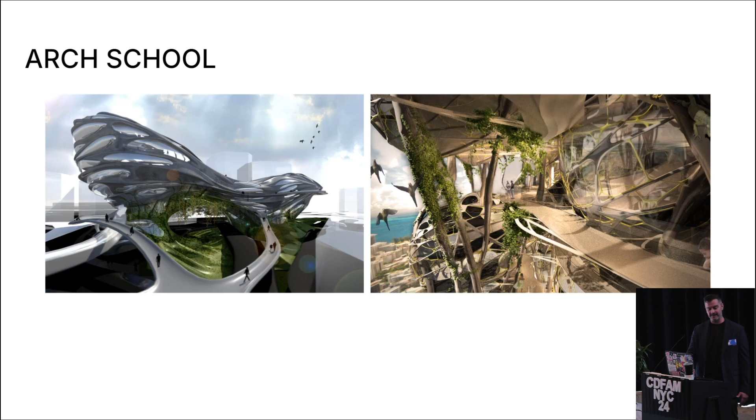We did get some cool projects under our belt at first. The second we graduated from Penn, Arthur went to Paris, I moved to San Francisco, and we started working on some architecture, and we did leverage some of those things we learned.

So on the left you see Adobe Illustrator, if anyone remembers Scriptographer - it's a throwback for sure. It's basically a patterning plugin that goes into Adobe Illustrator, and mixed with AutoCAD, Arthur was able to make some really cool facade systems that were plasma cut and painted green.

And on my side, I was continuing with Rhino and Grasshopper, but really starting to learn Revit at a corporate level, and understanding the very subtle facade systems that were, in this case, like basically stones and different types of masonry. So it was really exciting to start to leverage this stuff outside of school.

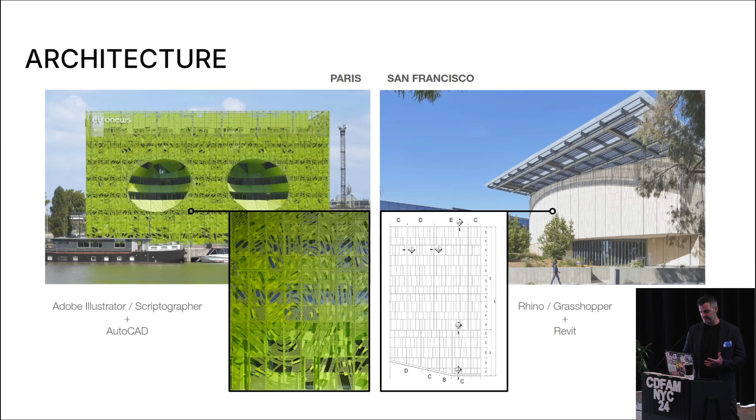So in 2012, we launched Slicelab, like I mentioned, remotely from San Francisco and Paris. There was a 9-hour difference, and at first that was something we had to work through, but then we realized it was quite an advantage, not a disadvantage, because it allowed us to work around the clock. So if I was done with something, I would pass it on to him, he would continue it, and round we went.

Obviously, seeing each other was very rare at the time. We have also entirely worked remote since then. We have never lived in the same city since we started the company, so it was really fascinating. During COVID, not much actually changed in terms of our workflow. Obviously, clientele and everything was a little different, but we've worked between New York, California, Colorado, and Massachusetts.

So starting off, the printers that we wanted to be using were not very big, so we would not have access to that kind of stuff. I don't even want to admit how much we paid for this Ultimaker that we had to assemble ourselves, and that was really challenging to use. But that was the first printer that we had.

We thought we were going to build out a whole lab and do this whole thing, but we quickly realized that was not going to be the path if we wanted to be successful, and we would want to focus more on the actual design and let other people print stuff, even though it was really helpful and intuitive to design the stuff and see it printed right in your space.

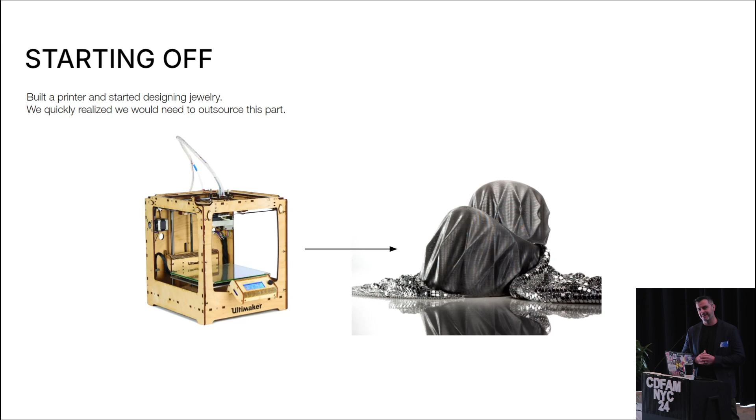We started with jewelry. Jewelry was something that was really translatable to what we learned in school, and it was something we could print relatively quickly and learn from. At the time it was kind of in the industry, people were starting to do it a little bit. We were initially inspired by the architecture we came from, so we took those structures we found very similar to the designs we wanted to use.

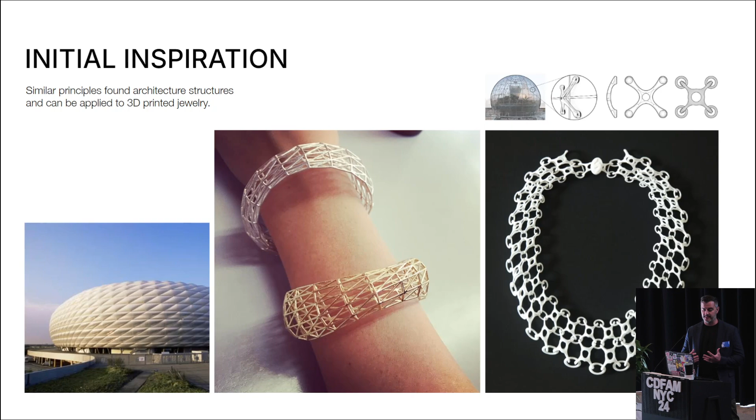We extrapolated the principles and tried to make jewelry out of it. We started relatively simple at first with FDM prints, then we got into metal and casting, and also chainmail-like lattices that kind of resembled this stuff. We got really interested in that, and that's when Autodesk basically said, why don't you guys come to Pier 9 and work in San Francisco.

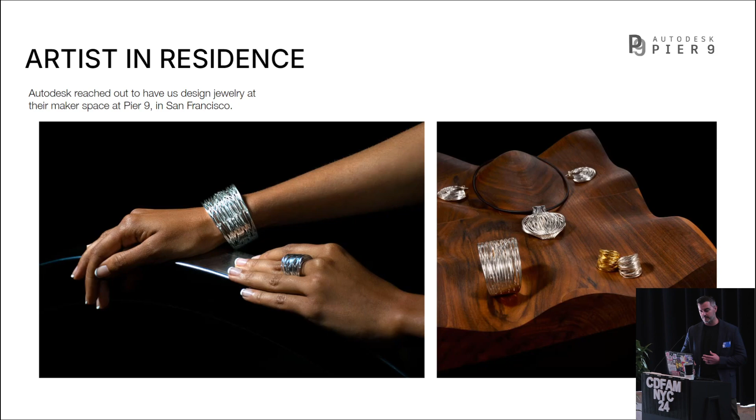Design some jewelry with all the state-of-the-art stuff we have here in the lab, and all the software you can use, and see what you can do. They specifically wanted us to work with the printer they were about to launch shortly after our time there. So at the time we created a few lines of jewelry.

They were all inspired by the suspended weightlessness you see in marine life. That elegant time frame where something is just floating in time — you take it out of water and it looks really different. We were really fascinated by that. This is one of the lines of jewelry.

This is when we started using hair systems in Maya, basically like a curve attractor computational software plugin. It's actually built in now, but it was something where we started to understand the workflow of how we would take our thought process and actually make the geometry, and have control over it — not just make a single one-off piece.

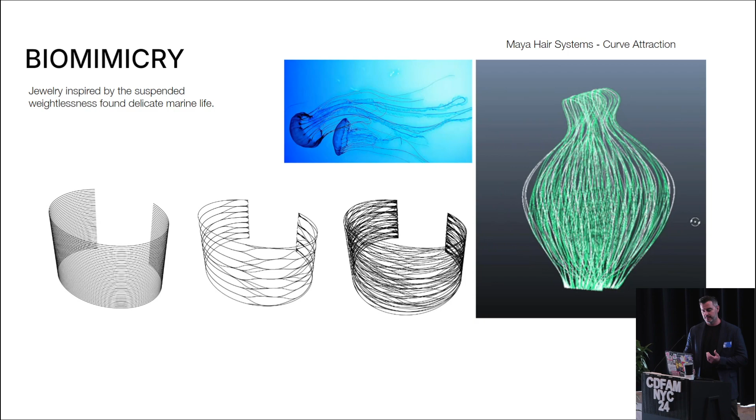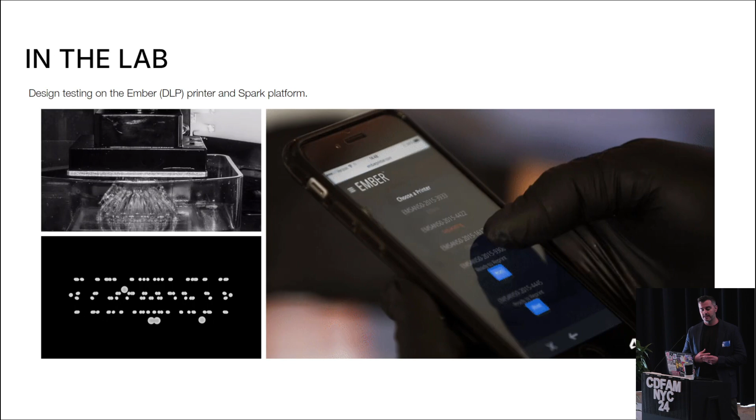But what was really exciting, and a pivotal point in our time with Slicelab — this was about 3 years in — is that we were part of the lab. Arthur was flying from New York every 2 weeks, and we were able to be inside the lab, both testing this Ember — this is, RIP, it's gone now — and their Spark platform, which you see on the phone here.

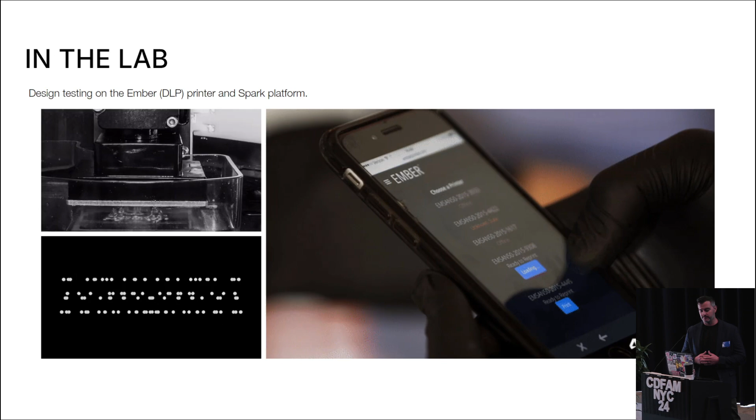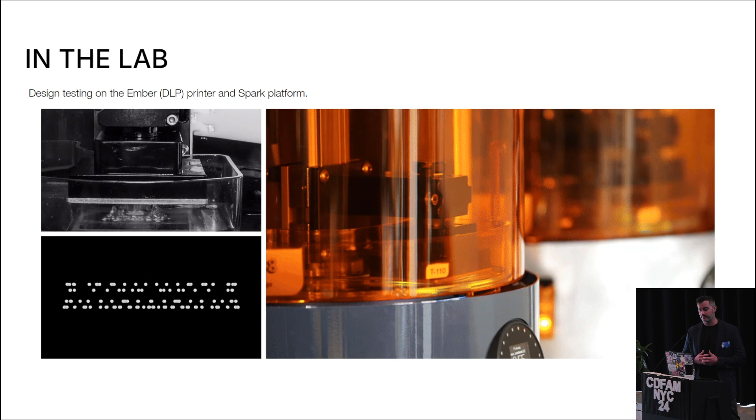It was really fascinating to be able to basically change stuff on your phone, send it to print, go get lunch and come back, and then really start looking through the slices and how the machine would make it. But really it was a lot of material testing. There were a lot of updates to all sorts of resins, specifically wax-infused resin that we had to basically burn out for the casting process eventually, and testing out what was working and adding little things to the machines.

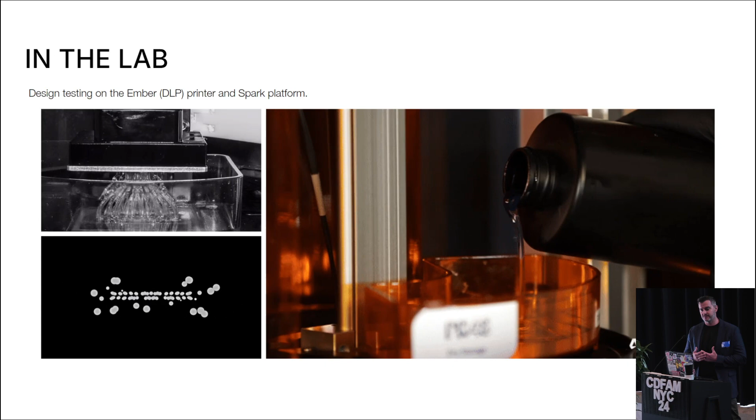And it was basically, we realized that this is what we wanted to be doing for sure. But that being said, we also still had the goal to continue to try to claw back our way into architecture — we're still in love with architecture, and we still are today. But the design scale and our focus has basically evolved over time since the beginning. So we went into product design and started getting larger into event space. We built this cool tree house in Santa Cruz and started doing restaurants and residential complexes.

But we realized at that point that as we were getting bigger, we weren't doing that same digital fabrication that we wanted to as much. So we kind of went back down scale and kept around the product design scale. And we're basically going to cover two scales here today of some of the projects we've been working on.

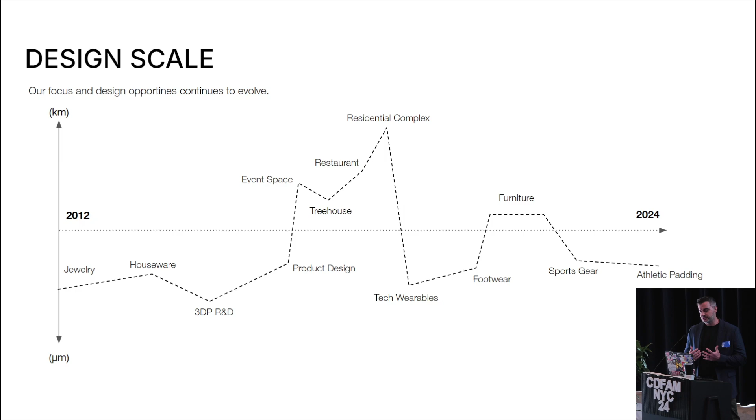So finding our niche throughout all those different scales, it was exciting to realize that really design innovation for us was just through simplification. So as we did design research on material, geometry, technologies, and all sorts of different workflows and fabrication methods, we realized that if we can just take the simple aspects of them and apply them in correct ways, we can basically make product design for additive manufacturing pretty exciting and pretty fast.

So computational craftsmanship, which is basically the title of our presentation, is something that we like to hone on. It's basically all those years and different ranges of fields that we've been in, and taking a little bit of each one and using those to our advantage to make our designs possible.

We always look at software as something that is deliberately chosen, and the workflows we make help us create interesting outcomes. We don't see it as something that defines our design language; it actually enhances it. So we introduced a sensory layer as well, which allows us to have a quick feedback loop once we start printing and touching stuff, making sure our work isn't detached from the reality it inhabits.

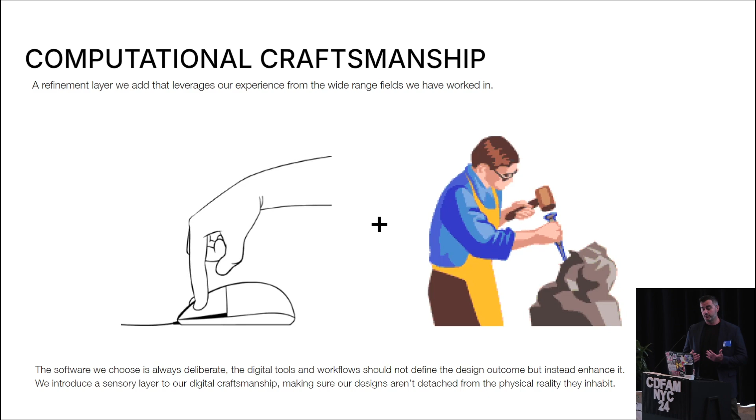So our digital toolbox, which is basically what we've been building over the last 12 years, includes our go-to softwares, but we experiment with everything. If you have new software you want us to try out, we'd love to try it. Mainly we like to focus with Rhino and Grasshopper and have our own workflow, but we've also played a lot with Maya and Fusion 360, and recently a lot with nTop as well.

Basically these workflows are just as important as the design elements themselves, because they allow us to make really quick iterations and shorten that feedback loop so we can get products out faster, since we're not only doing research, we make actual products for clients.

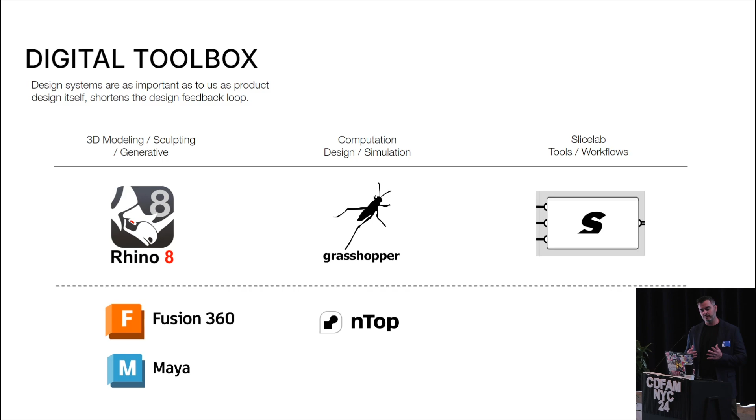So I'm going to cover large scale designs here. Basically furniture was something that we've recently been focusing on a lot, and this is all R&D, so it's been exciting to see where the technology has gotten to since we first started, 12 years ago. Recently we did what was called the carved bench with Eventscape.

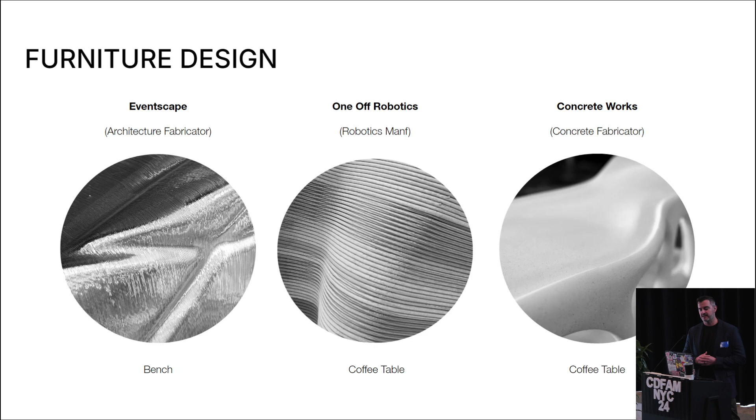It was really exciting to use AI Build for the first time to understand how a company that fabricates things in the architectural world works, and to really understand the tool path and how we can simulate non-planar printing, as well as jump between tweens. You can see there are a few layers here, and these are some of the pinch points we have right now with the software.

So this is where we come in to work with engineers or whoever's on the software side to fix that. This was the first prototype, and I wanted to show that one so you can see the lines there.

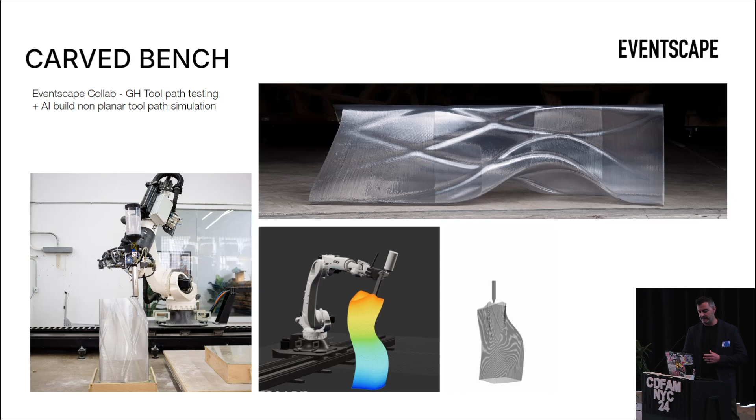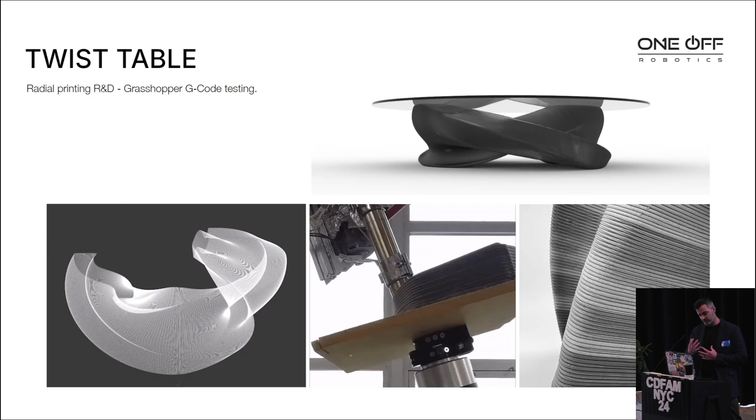The other project recently was with One-Off Robotics. It was really exciting—they had an experimental material, and we thought, what if we take a really simple idea and design where you spin an object into a radial form, and print it radially? There's a fixed robot, but it has a table that twists out in a radial format to create that shape you see here. This was an exciting and challenging project for sure.

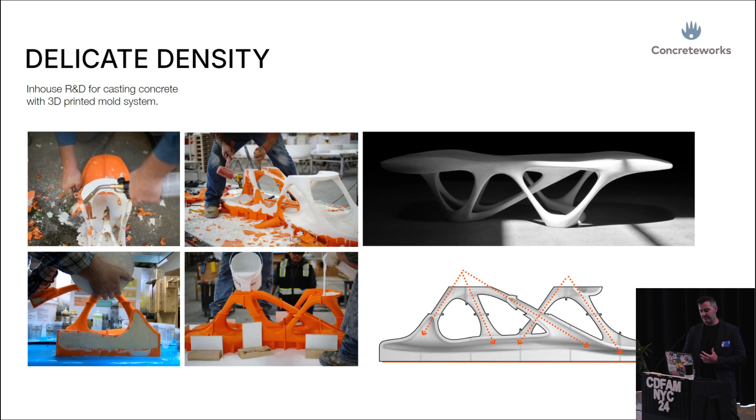Basically, we make ideas, we make them, we test them out ourselves. How does it pour? How does it unfold from the molds? And what is the hydrostatic pressure that's going to happen here? Where are the parts going to break, and how do we alleviate that? This type of stuff allows us to understand what we want to be doing once we start getting to the larger scale.

So on the product design side, a few projects I want to cover here, and I'm going to pass it over to Arthur in a second.

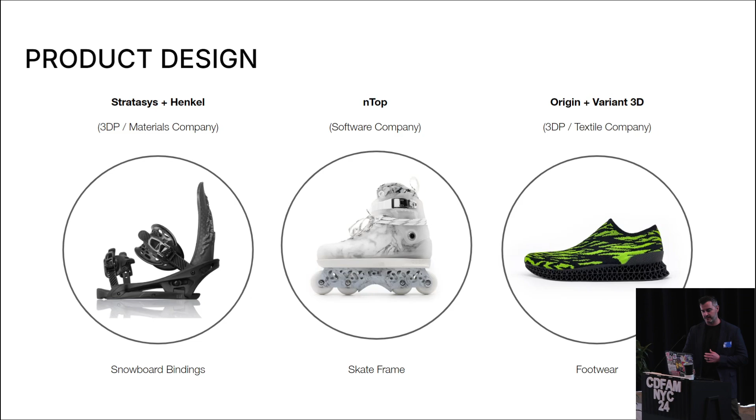So the mountain backs are these snowboarding high backs that we designed. This is with Aaron Porterfield—we work with him a lot, he's amazing, he presented at the last conference. And this is with Stratasys and Henkel.

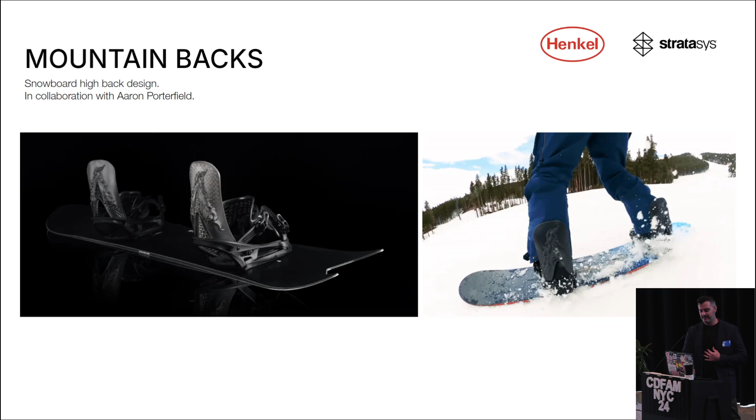This is basically a material study for a relatively cool project. This is a passion project for me. Arthur's about to get into his passion project. I was living in Colorado at the time, and I was really inspired by the mountains.

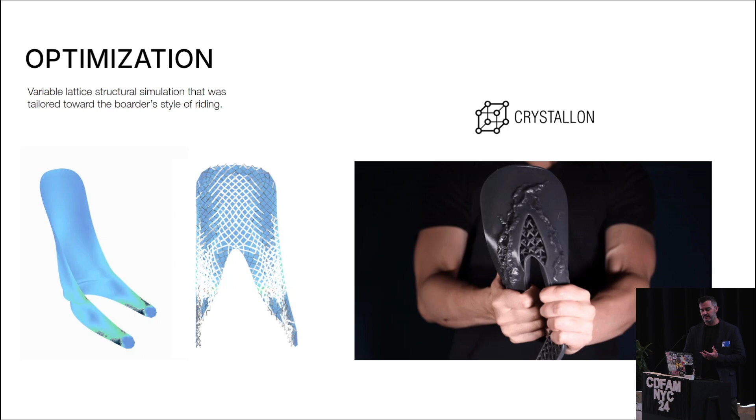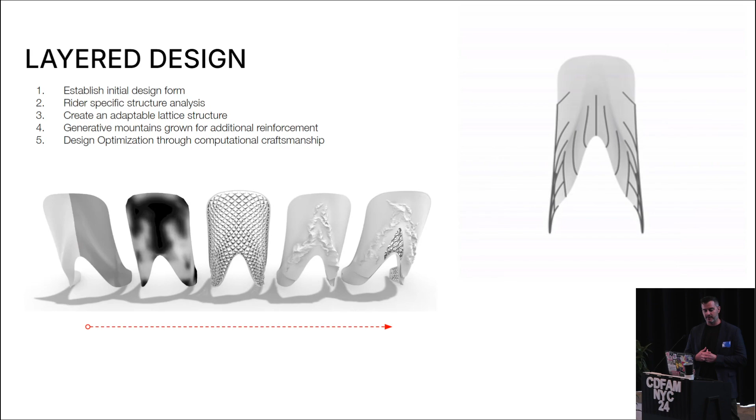Using optimization for variable lattices and understanding the boarder's style of riding, using different geometries to inform the structure was really exciting, and also lightweighting the high backs. This is something we do with all our designs, basically a layered design. We establish some sort of form, not always through the same process, and we have a specific rider structure analysis that we want to have.

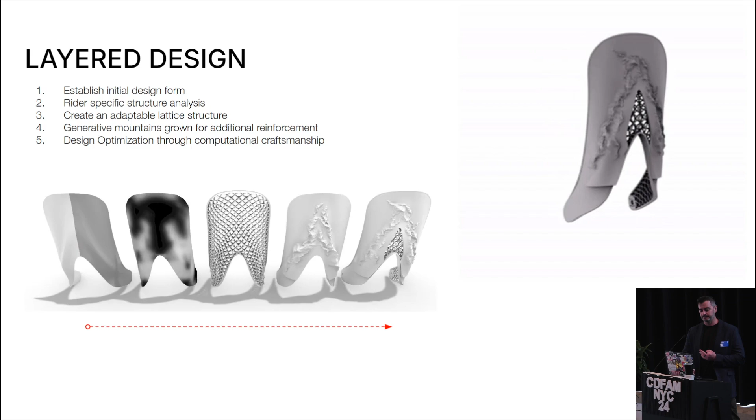This was an aggressive rider built for the backcountry, so we established a lattice that can be variable, and later we added generative design based on mountains. A mountain range basically adds structure to it. We're using engineering software to create designs in ways it isn't traditionally used. This is what's exciting to us.

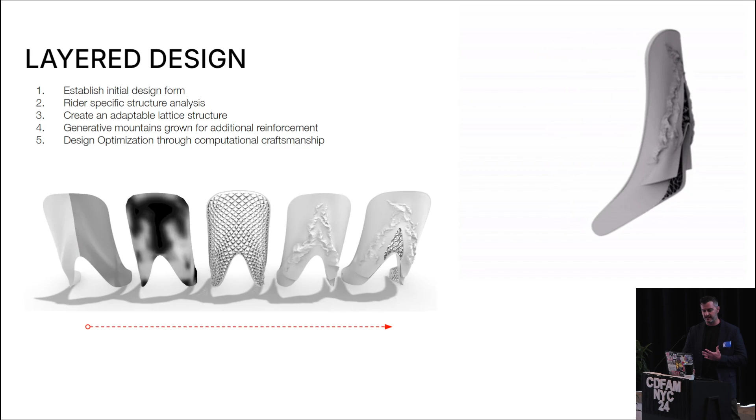I'll let Arthur take over from here. This next project was a research project, an R&D project we did with nTop, trying to understand how to use nTop for product design directly, and really understanding interoperability between Rhino, Grasshopper, and nTop.

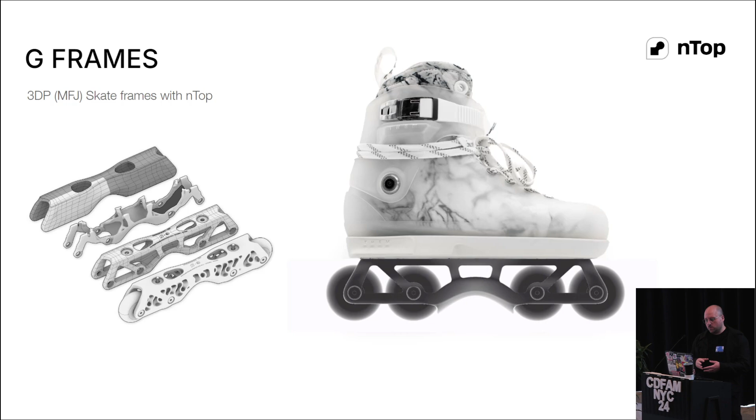Originally we tried using topology optimization in Grasshopper, but nTop was way better. So the idea is jumping back and forth, doing topology optimization in nTop and understanding how to take that back and inform the design itself, so we can actually control the design and not just take the result of the software. It's really understanding that back and forth and using all these different tools for what they're made for.

In this particular one, we really love the Boolean operation and gyroiding available in nTop, and used that as a design feature for the casing, for the actual product itself, to give it this carved look, without it necessarily being the typical gyroid you're used to seeing.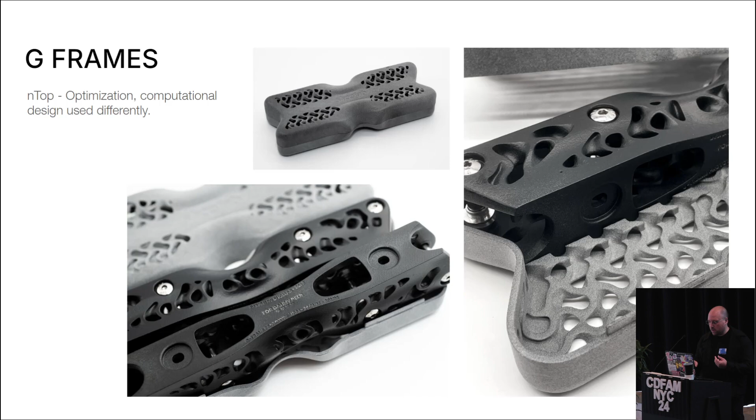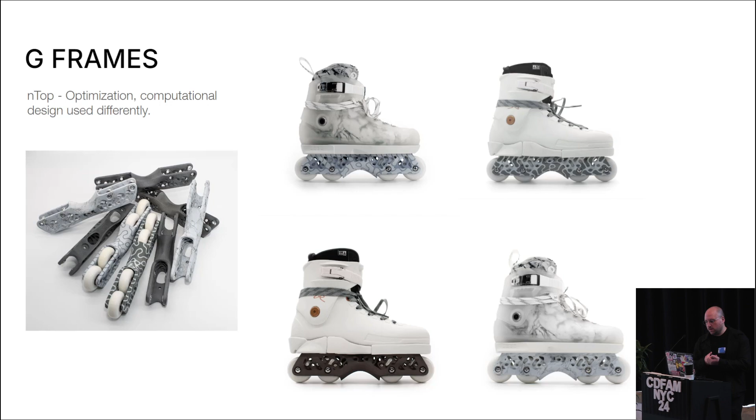We made a lot of variations on it. We were able to create the void and the fill of the gyroid to create a biomaterial look using MJF, and using different colors, as well as actually printing this marble texture on it, which was really cool to us, that you can actually have texture on the print.

And it got tested by a bunch of people, and it works. You might recognize one of them. He might be in the room today.

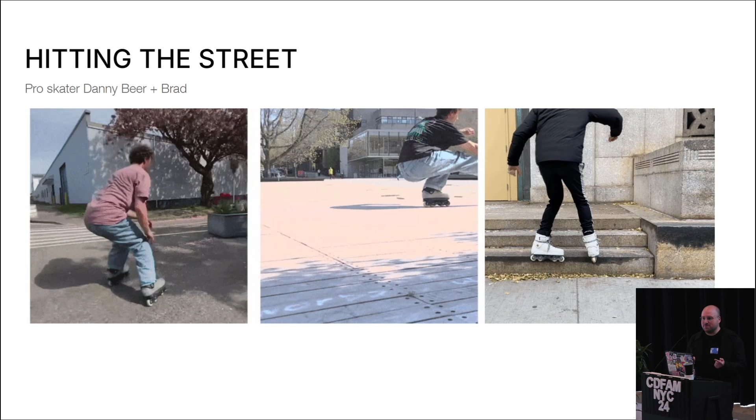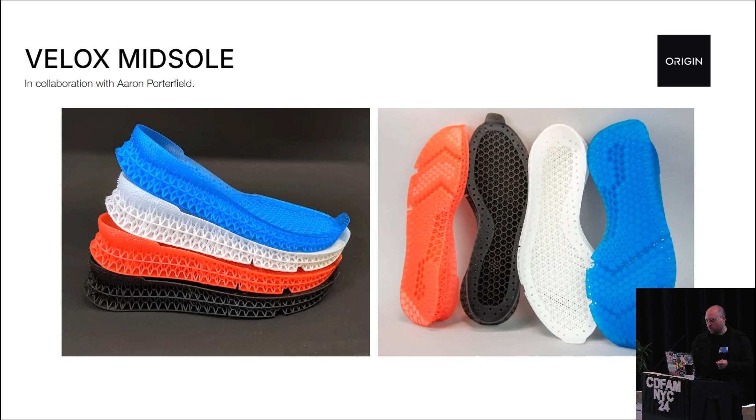This next project is a really interesting one. It's another collaboration with Aaron - we worked on the midsole with Crystalon with Origin about 5 years ago. I won't go too much into detail given the time, but what was really great was meeting the team here from Variant that helped us basically finish the project last year.

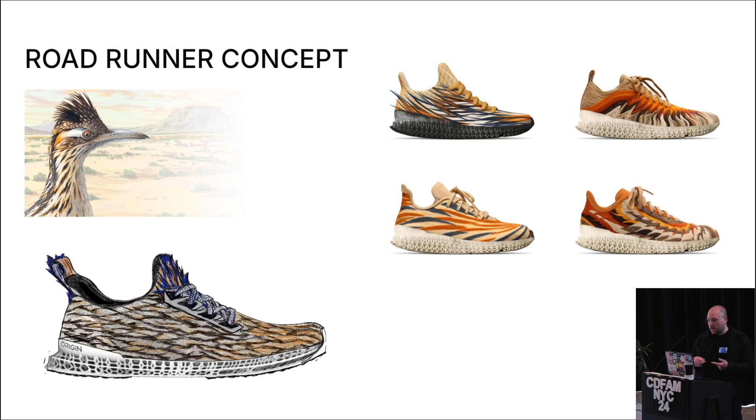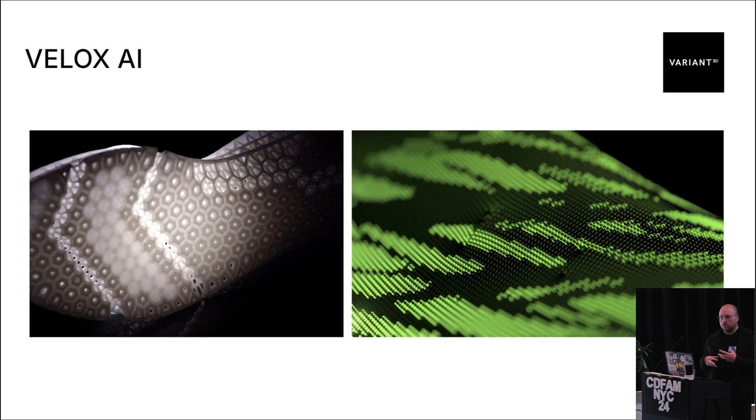Using AI, we went back through the concept of the Road Runner, the original concept, and were able to develop a lot of new textures and actually implement them into the upper design. Working with Variant, we went through and did the 3D knitting. This is the pair that you see here on the side.

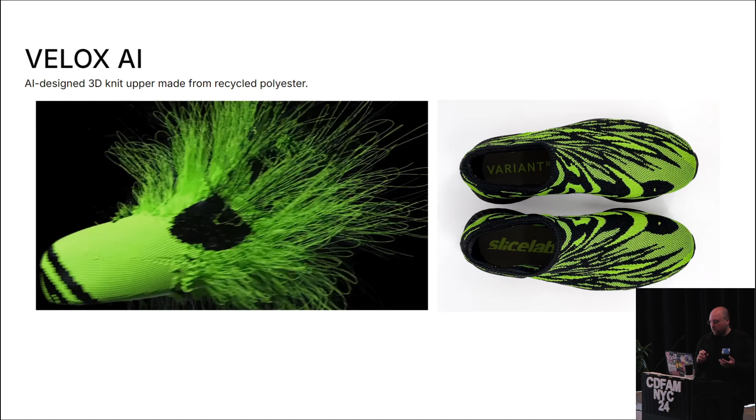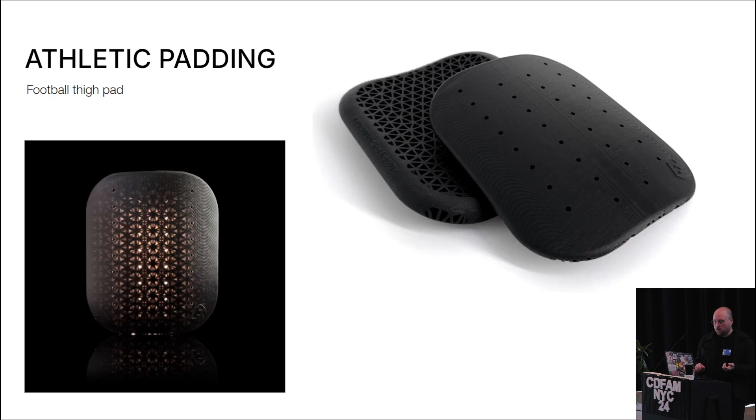The really exciting project we want to introduce today, that we've been working on for the past few months, is a collaboration with Freeform Sports, and it's about athletic padding - football thigh pads that we've been working on.

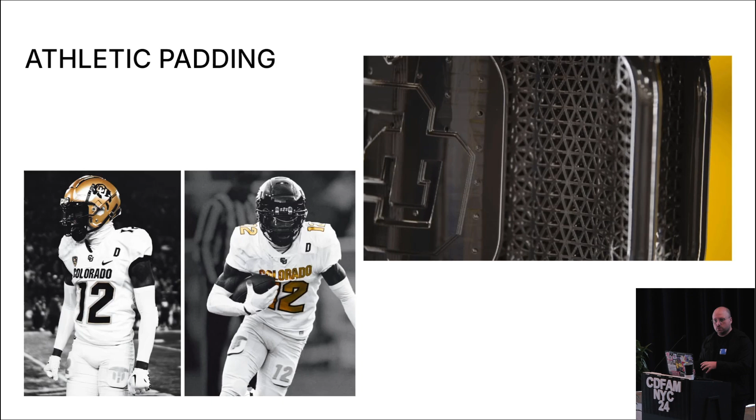Printed with Carbon - we've been working with Carbon on this using their EPU 45. You can see the pads being worn right there. I want to take you through the process and how design informs a lot of the decisions we're making, while still using lattice engineering to make sure the performance of the pad is there.

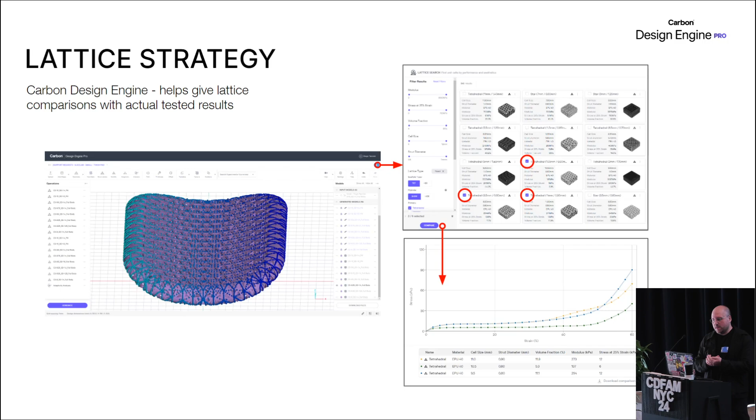Really mixing the two - the lattice strategy, we've been working with the Carbon team and the design engine, using their library to start guiding us into which lattice is going to be the most performative for this type of product and what's best for impact resistance. From there, what was interesting is working with them, we're able to get the actual CSV out of the lattice so we can control it directly and feed it back into our workflows and system.

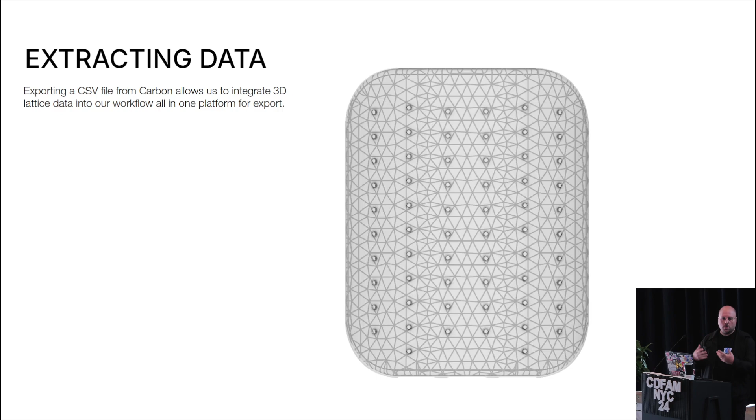A lot of this is worked within Rhino and Grasshopper, and by extracting that data, we're able to control where all the escape holes and drainage holes are implemented based on the lattice, not just randomly. One thing that gets complicated with these lattices is finding where to put escape holes to ensure correct drainage when the part is printed. That was essential to integrate into our design workflow, making sure the skin of this pad is there.

Using our homebrew meshing system out of Grasshopper, once this lattice is made, we're able to reduce the overall size of the meshing. It remeshes everything and gives us those nice rounded edges.

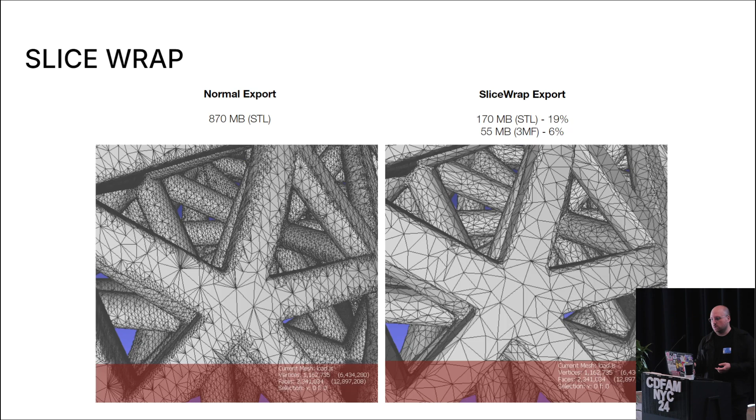Then using 3MF, since it's the sponsor of the conference, we're able to bring the file size down because we're generating so many files through this project. It's been helping us reduce upload time and things like that.

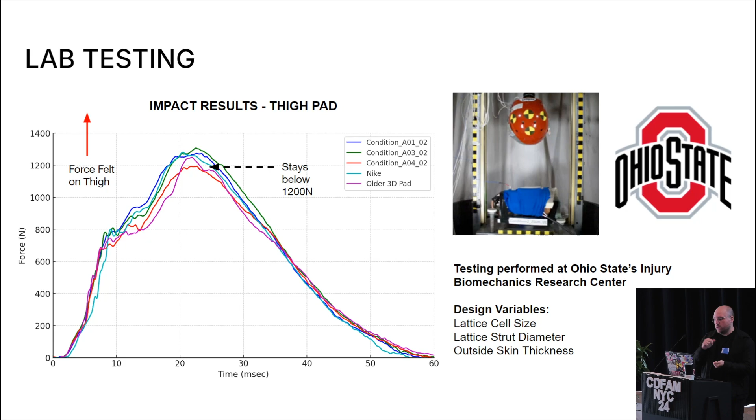What's really great is this was tested at Ohio State's Injury Biomechanics Research Center, and it tests better than every pad on the market. We're really happy about that. It tests better than the previous pad we worked on as well.

What we're excited about for the next phase is introducing simulation into our workflow. Before we even get to physical testing, how can we simulate this digitally so that we can narrow down the right pads and then get those tested.

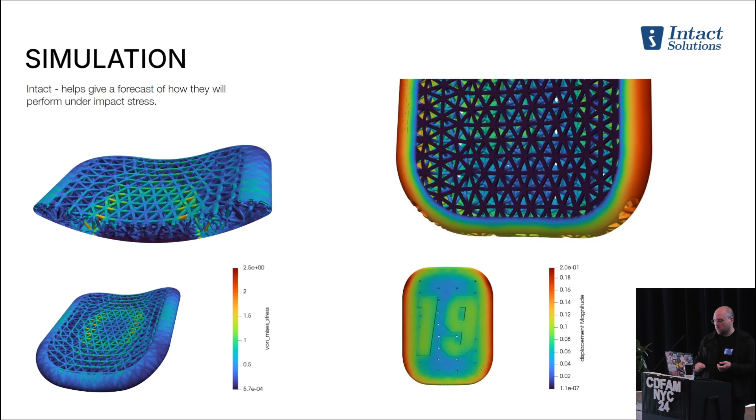What's interesting is we start introducing numbers and things on top of the pad, and that's where design really comes into play. So we've worked on design automation. We have to use different fonts, and we have logos of all these different teams to take into consideration. This is where a design eye is critical, because some logos are way more complex, and you have to respect their visual integrity—you can't change them. When it comes to 3D printing, small details get really difficult, so where do you round the corners, and how do you work with different fonts?

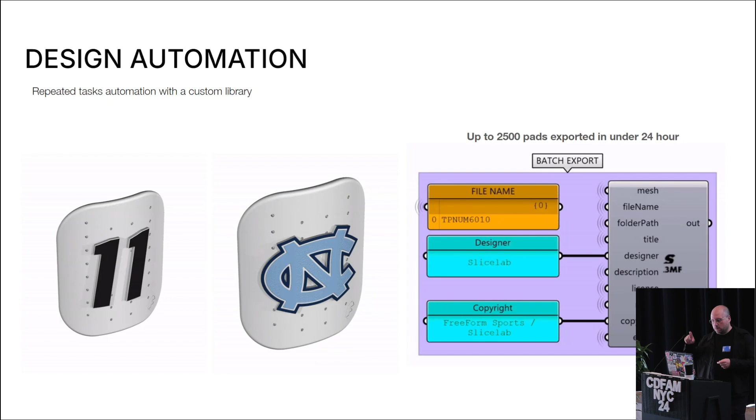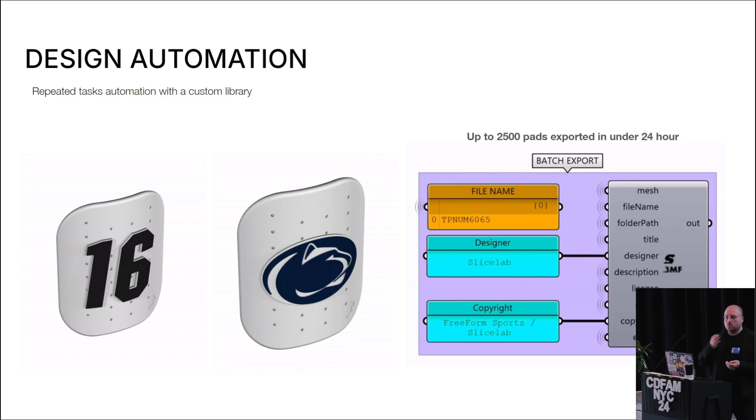Thanks to Dwan, Scott Davidson, and the Rhino team, we were able to set up a 3MF exporter out of Grasshopper, so we can automate the export of about 2,500 pads within 24 hours. Whenever we change something, we can just let it run and re-export everything at once, which is really great. I'm happy about building that library.

And yeah, I think I'll let you conclude. Sure.

Also, let's not forget we got into the NFL—Baker Mayfield, we just found out a couple weeks ago he was wearing them, which was really exciting since he was the 2017 Heisman winner. Getting into the NFL was a bit more challenging than the NCAA, but with all the NIL deals happening recently, it's been exciting.

In conclusion, I hope this slide isn't too controversial, but we prefer design over computation—it's just a tool. We don't look at it as the main thing we do; it's something that enhances our design. At the end of the day, tactile form and function is really what's at our heart, and we hope you understand that's kind of what we are. We're a design studio that uses fancy tools, and we like to use them in a way that's beneficial for aesthetics and for function.